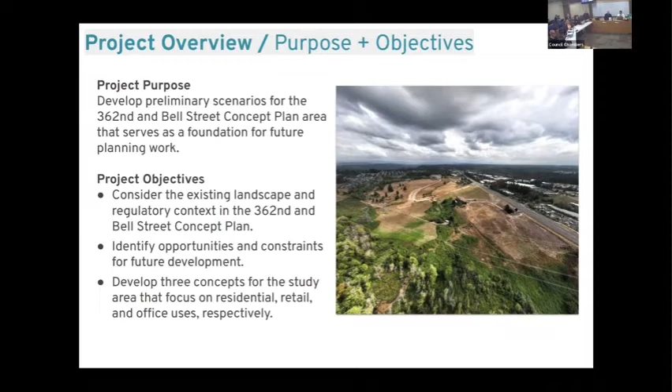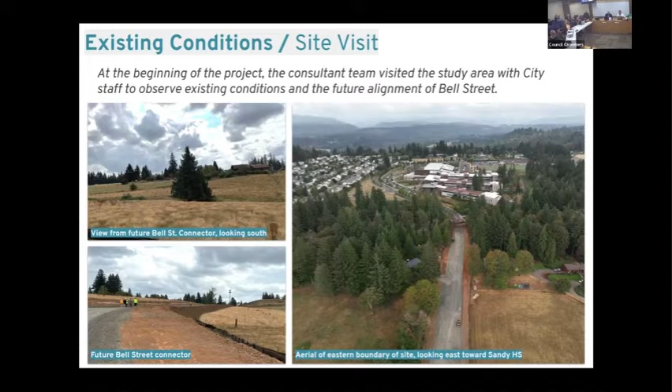I'll walk you through the existing conditions we found on the site. As I mentioned, we did a site visit at the beginning of September with staff. We were able to walk a large portion of the site, particularly where the Bell Street connector is going through, and started to get a sense of the constraints, topography, and lay of the land.

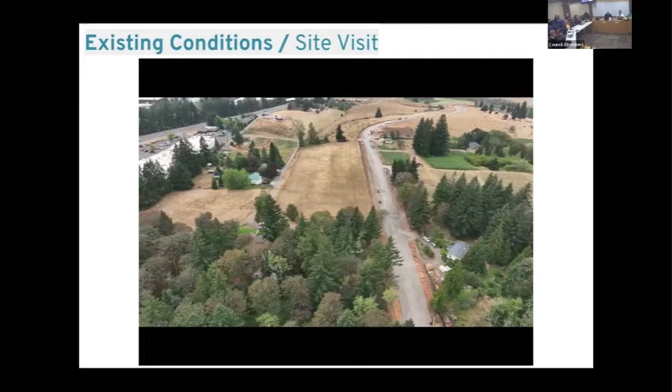This is starting from the vantage point of the high school, from the Mount Hood Athletic Club, and continuing along the eastern boundary of the site heading north, and you can see at the end the Bell Street connector going through. So it really shows the site well from that vantage point.

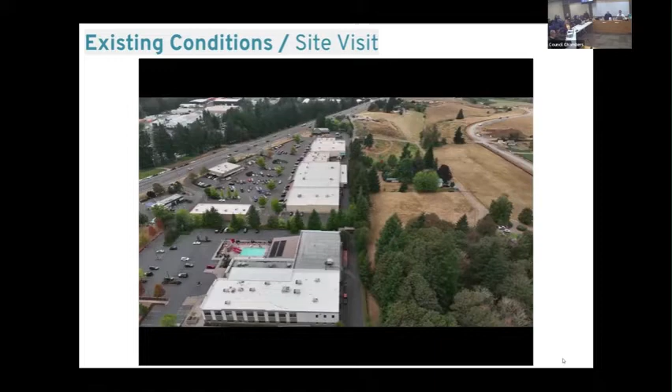From all of that data collection on site, we did work behind the scenes gathering map information around zoning context, those constraints I mentioned, as well as existing roadways, intersections, and crosswalks. We also overlaid that with a quarter mile radius, which helps show connections between the existing residential in the northeast corner of the property, or just outside the property boundary, and the high school, and how that might fit into this site.

A quarter mile tends to be how we describe walkable neighborhoods. You can see approximately two quarter-mile radii fit within the boundary of what we're talking about for the concept plan area.

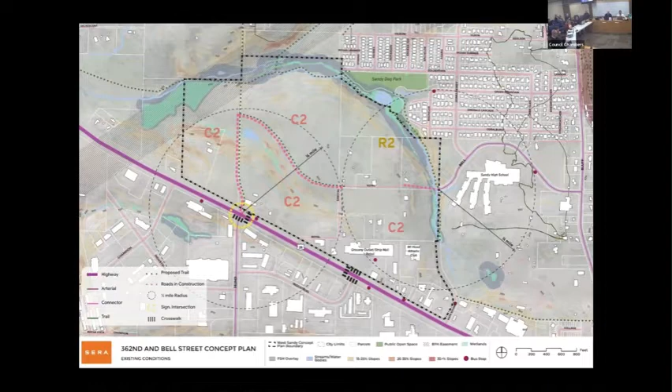As a reminder, this area is largely R2 and C2. As you can see in the previous map, the majority of the site is zoned C2 currently, with just a small portion of R2. R2 allows single family detached and attached dwellings, as well as duplexes and multifamily dwellings. C2 allows multifamily dwellings above a commercial business, which we often refer to as mixed use, retail businesses, other types of office, some light industrial uses, and other commercial uses briefly listed in that bullet.

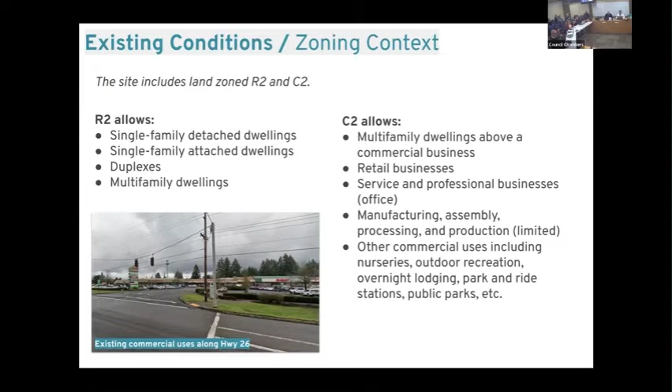I apologize, this might be a dumb question—senior housing, that would be, I think of it as commercial, but is it residential, or how is that usually classified? I'd have to look in our zoning code, to be honest. Yeah, look it up—it's probably listed as a conditional use, is my guess. But I can confirm. Yeah, cool, thank you.

In addition to the zoning context, there's a layer of regulatory context you've been talking about recently. There's the draft economic opportunities analysis, which affects industrial and commercial land, and it shows a small deficit of industrial land and a small surplus of commercial land. Then the housing needs analysis, which is in progress, but the results may have implications for the zoning possibilities on this site. If there's a deficit of medium density residential land, changes from residential to commercial zoning will be challenging.

I want to note the previous slide deck we sent out had this flipped, so if you see that in your previous ones, that should make more sense now. We'll go over this again when we go through the preliminary concepts, and this may start to make more sense based on what we've sketched out.

Doesn't necessarily align to zoning boundaries in all cases. But if there's a surplus of medium density residential land, there may be a possibility to change some of the residential to commercial zoning, depending on the results of those analyses. So just something to keep in mind, and we can go over that again as we talk through our concepts. I'll pass it over to Martin to talk about opportunities and constraints that we reviewed.

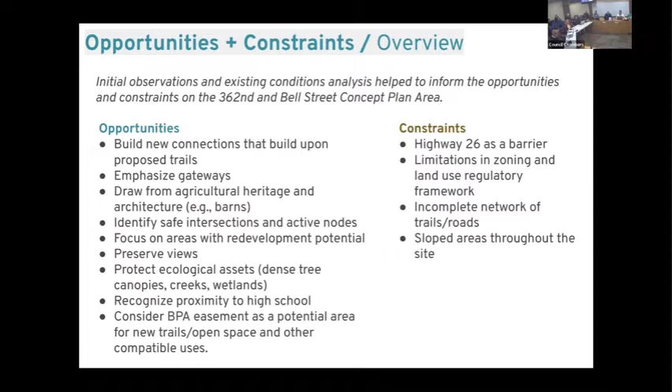Can I add what I think is one of the constraints? You alluded to it with the slope - the terrain may limit some of the utility hookup ability with the sewer lines, because that's so much of a gravity thing. I know that was an issue a year or so ago when we were looking at this, so that's something to look into. Yeah, it might require pump stations to get that stuff over the gravity point, so to speak. And Sandy, it all flows downhill too. That was a really good one. We didn't go very deep into the infrastructure part, so we won't touch on that too much in this presentation. Point well taken.

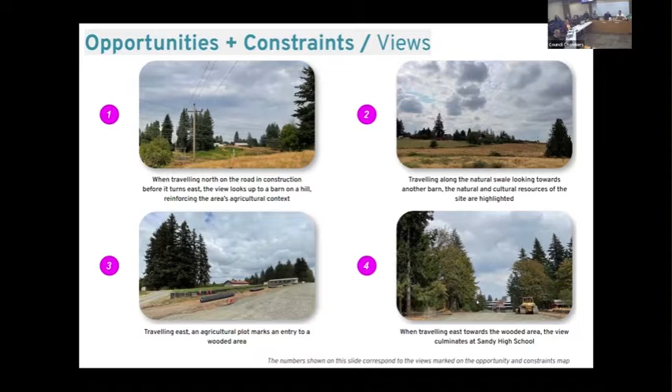How steep is that going to be? Well, it's on the previous slide. Have they flattened it? Yeah, last time I saw it, it was like, holy smokes, you're not going to sled out there. They've flattened that out quite a bit.

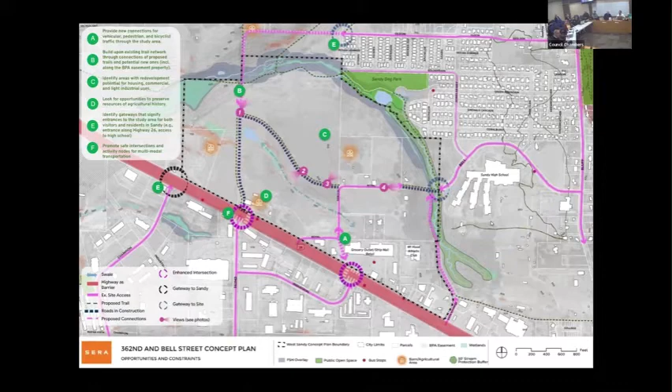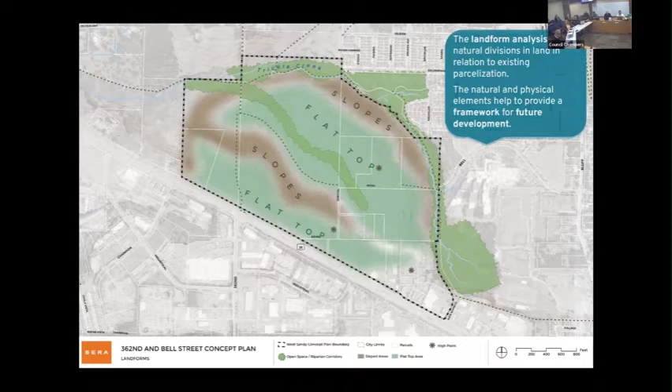The point is, these are important headwaters to that creek which goes all the way into the Clackamas River. Then that smaller drainage -- there's probably a seasonal drainage between those two flat tops -- runs parallel to the road extension.

Here's another way to look at that. We interpreted that landform into this framework diagram. Without applying land uses to it per se, it makes a lot of sense to look at these connections for roads based on that landform, and to look at that central drainage as an asset to the site. So that's what we've been carrying through.

That isn't to say that in a later phase you decide it's more valuable to turn that into developable land by regrading that site. That's always an opportunity, but for now we think there's some real value in how we could separate land uses on the site.

So we see that coming back. We see a future extension of Bell, obviously to 362nd - that's what's being built right now. It can go farther west and connect down to Highway 26, right where Champion comes in, so it could create a full intersection there. And then it could extend north to make the connection with Olson.

Finally, I want to point out three more connections that make a lot of sense: industrial coming from the south, turning up to 26 and then crossing it. At some point in the future, if redevelopment could occur on that strip mall grocery store, that would be a great connection to have back. Nothing you need anytime soon, but in the long term that would be a real great connection, just as this connection along the eastern boundary of our study area, along the drainage from 26, going straight north and connecting to the Bell Street extension.

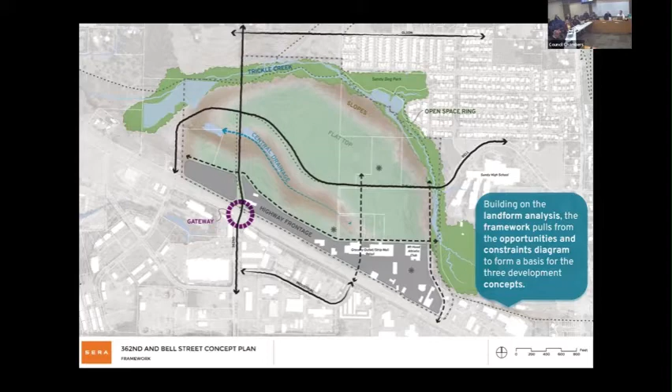Okay, so if this is our framework, and I hope that makes sense, we'll build our land use concept on this framework. So we're not tweaking this framework too much - there may be an opportunity to do that here or there, but I'm ready to move into the concept plan.

We wanted to provide something that was very contrasting, maximizing a few different areas: residential, which we gave you a look at based on our housing needs analysis and economic opportunities analysis; one that's retail focused, more consistent with the underlying zoning, enhancing it with urban design principles using the landform; and an office concept looking at this land as an opportunity for high wage jobs and employment, and how we can realize a vision like that.

This is a starting point. Staff worked with urban designers and planners to come up with concepts to get the council and board thinking and give us feedback—is it worth exploring more? Do we think it's better for retail, do we like the office, or do we need to center on a hotel theme? All those ideas are what we're looking for, just your feedback to start this conversation.

I did want to touch on the timing of bringing this to the board. This is an urban renewal funded project, in the urban renewal district. We have goal setting coming up, getting into that mode, and we'll be talking about project priorities and opportunities as the road project gets completed and this urban renewal land opens up for development. Just wanted to touch on that before Martin jumps into the different concepts.

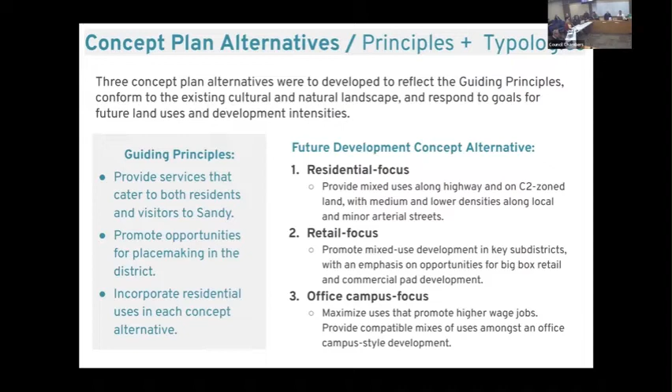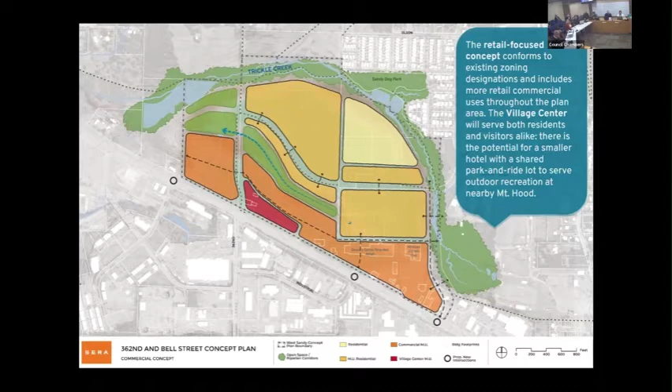This is our retail focused concept. That means it conforms to the existing zoning designations and includes more retail commercial uses throughout the planned area. Again, I'll use that same term, village center, but the same intent is happening in that red area, serving both residents and visitors alike.

So the commercial area is in orange, the village center mixed use is in red, and then we're showing an orange mixed use residential, so there could still be some retail opportunities in that as well. So we're sticking with the light yellow, the lower residential uses.

Yeah, Lauren, please. What type of things do you typically see in a village center mixed use?

Started mentioning some of them. Let's say this could be where there's a half-acre plaza with a splash pad with a coffee shop next door, and maybe the parcel over has a hotel that can take advantage. Park and ride gets activated, so if there's a bus stop, there's a place you can get to that use. Also, when people come back, they have a bite to eat, drink something, but they have an open space to make.

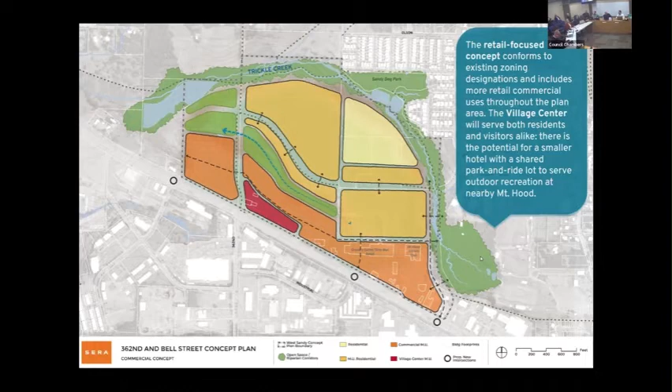I could do the samples. Hot dogs. That's my retirement plan, right? TV doesn't work, I go downstairs, get a new one. Unbelievable. You also get to listen to the backup horn of the... oh, the forklift. Good point, good point.

So this is our final and third alternative at the border, but this would be, let's focus office and maybe research and development campus district on this site. The site is beautiful for it. If you could attract an R&D operator, I think they would be quite pleased in terms of the beauty of the site and the relation to the topography.

Typically those sites have an organization that is sometimes almost like a campus, that's why we use that term, like an educational campus. So we see opportunities for that connection to the Sandy Park. There's also a dog park in the upper right.

We have a slightly larger center around that 362nd intersection with 26th, something that both supports that R&D use, so office workers have a place to go, but again this could also be the connection for residents to enjoy the campus grounds and come across the ridge to that center on 26th.

So just reading out loud what's in the bubble: this concept is an office-focused concept. It expands the C2 zoning into the existing R2 zoning district with campus-style office development geared toward research and development. The expanded village center, so we're making it larger here, is adjacent to the existing commercial business, accommodating services for visitors, residents, and office workers.

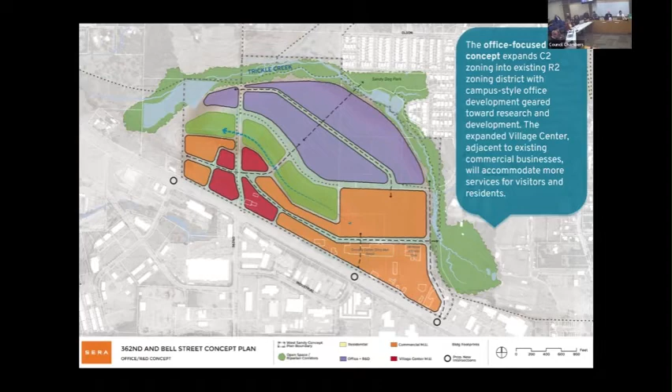That's the beauty of these discussions, mixing and matching these concepts. That's how you can look at this as well. So again, just to summarize what we saw, don't forget the framework diagram underlying all of these. Then it becomes almost like color by numbers, right? What colors do you want where?

We feel strongly about the framework we came up with. It seems to make a lot of sense and works really well with these three ways to explore different methods, but there are obviously other purposes. So did you explore, because we have a deficit of industrial land—and not that it always works well right up against retail commercial—was there much thought given to the topography and whether industrial would work anywhere on the property?

I'm gonna pass that one on to Jordan. Yeah, I mean the deficit is 9 or 10 acres, and I think that's probably going to be what we'll be talking about with the EOA and the comp plan—opportunities for that as we expand.

I think something in the EOA that's come under discussion a lot is building off the surrounding areas, like the fresh fruit and that sort of industry as you head up towards Kelso—maybe there's opportunity to expand industrial up that way. And then you have the I-3 land across the highway with Sabella Farms and things like that too.

But also, correct me if I'm wrong, C2 and I2 are very similar too, so that office park can also be sort of a campus doing manufacturing type stuff too, right? We have 10 minutes here and some next steps. I'm getting the sense from the questions that the residential was way over here, now we want to maximize commercial—that's the vision. The office concept was sort of this fun thing we want to consider, as we try to recruit some bigger firms to create high paying jobs in Sandy.

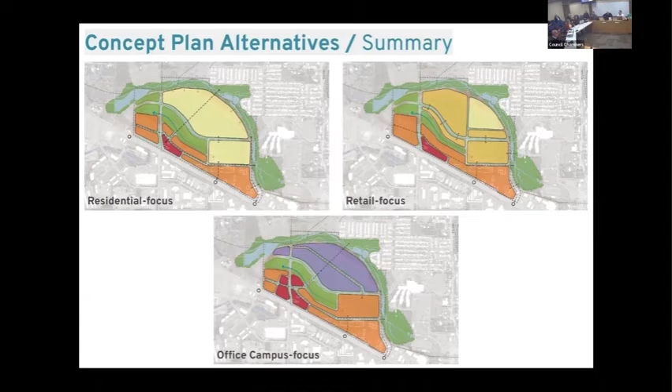What else do you need from us, George? So, next steps - thank you for holding the work session. This is helpful, and hopefully what we can come away from this is continued conversations about this as we get into goal setting and the budget.

This was an urban renewal project because this is our last big urban renewal piece and the C2 land in urban renewal. But if we now pivot to what would be next steps on this - traditionally you would see taking this to engaging with property owners, stakeholders, the neighborhood, and doing a more robust planning process to refine a concept in line with your vision.

That ultimately will lead to potentially doing things like code changes where you can have an actual overlay - let's call it West Sandy, or call it the old barn district, something that can get named in the process where you can start putting these things into play, that can help guide development.

Like Kelly said, zone changes would be tough, but what a framework plan would look like is things like how would you get infrastructure there, what would it cost, are there incentives the board would like to consider - additional urban renewal projects where we would be willing to partner on like a plaza, bring in transit-oriented development. I know there's a project about to be kicked off looking for sites for transit up to the mountain.

So that's what we really want to do - start generating an appetite to see if there is an appetite for continuing any planning work as we proceed in the next couple of years. Again, we kind of felt the pressure - the road project is here, it's happening, you can feel it.

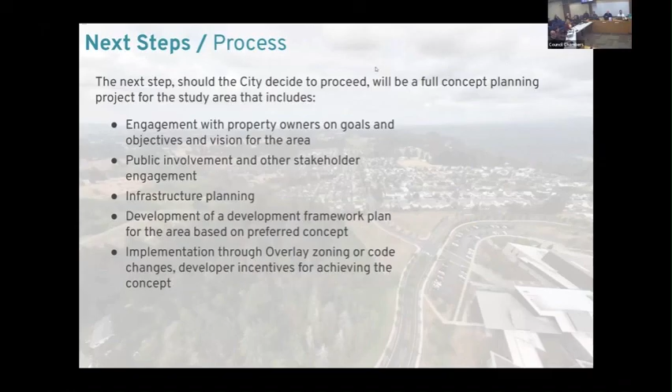All right, well, hey, I can't speak for all of us, but I really enjoyed this. Thanks, you guys. Yeah, thank you for the work that went into it. Appreciate it.